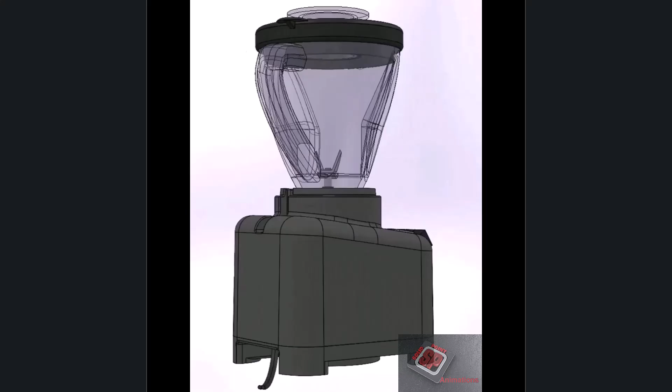This is a basic blender. You can find this machine in most kitchens across America and many throughout the world. Most people just use this product for its intended use, namely, to blend food together. They do this without giving much thought into how it works. In this video, we're going to change that.

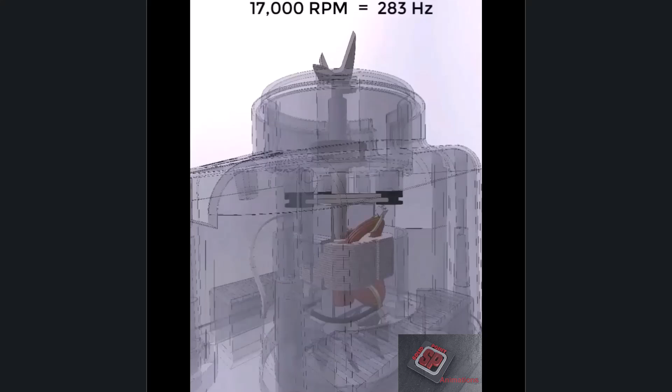We will go over how the blender is held together before we get into how electricity is turned on and moves through the device, how the electrical motor spins and expels its excess heat, and finally, how the blades of the blender actually break down and combine all the foods put into it. Wink wink, this probably does not happen how you think it does.

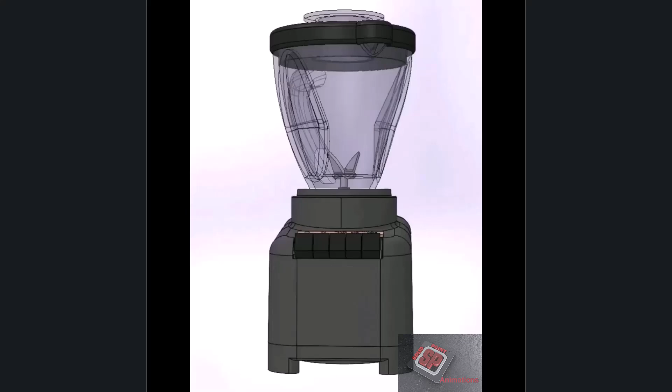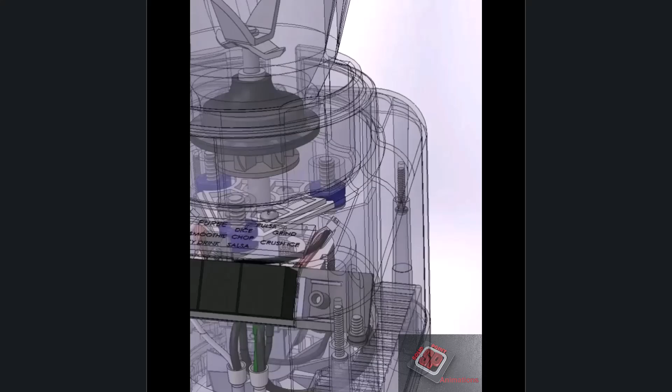This is the blender base. It holds everything together. It's split into the upper housing and the lower housing. The two housings are held together by these 4 screws, which can be accessed by a long neck screwdriver. The motor is screwed onto the upper housing via grommets using flange round head screws.

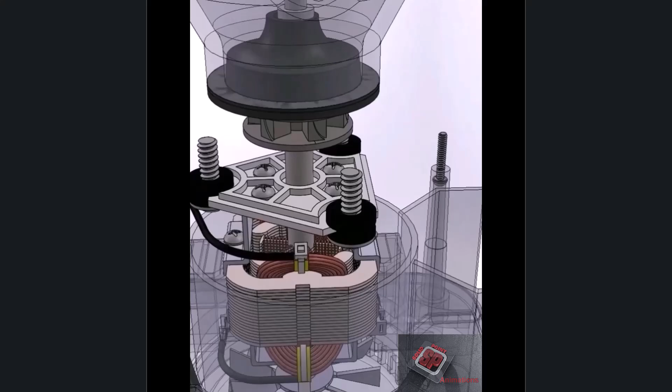These screws have a large load bearing capability because they are able to spread the preload of the screw over a larger area than a regular screw. This prevents the screw from pulling through the material under load, which is especially helpful when what you're screwing into is a rubber grommet. The grommets are then in turn attached to the motor mount, which has these 4 screws affixing it to the stationary part of the motor called the stator.

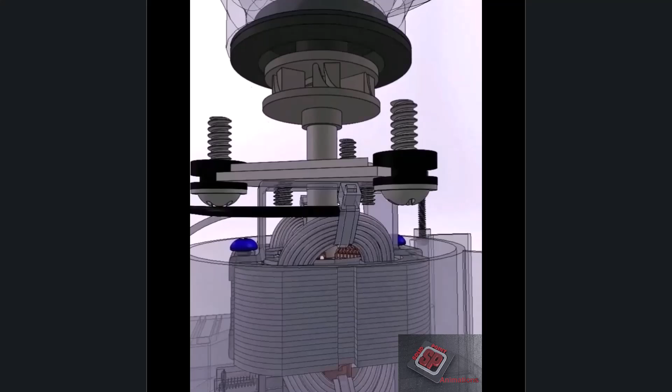The stator is made up of lots of different parts that we will not get into in this video. I do want to point out though, that these 2 long screws hold all the various parts of the stator together. The whole motor hangs down into the hollow cylinder of the lower housing.

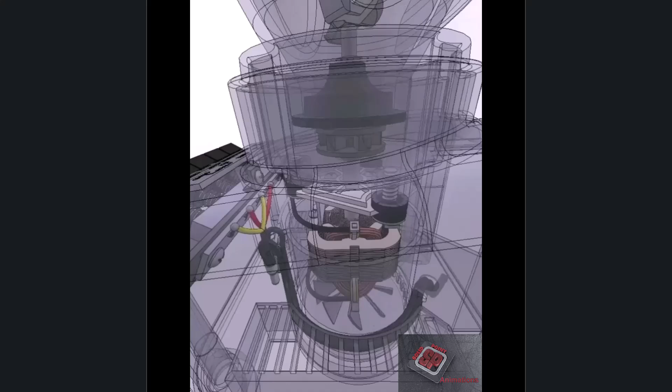The motor is held up by the motor mount and 3 grommets because the harmonic vibrations of a hanging motor spinning at 17,000 to 30,000 revolutions per minute can be quite intense, especially one that is even slightly unbalanced, as this harmonic simulation shows. Let's say the motor is spinning at 17,000 revolutions per minute. That translates to 283 Hertz.

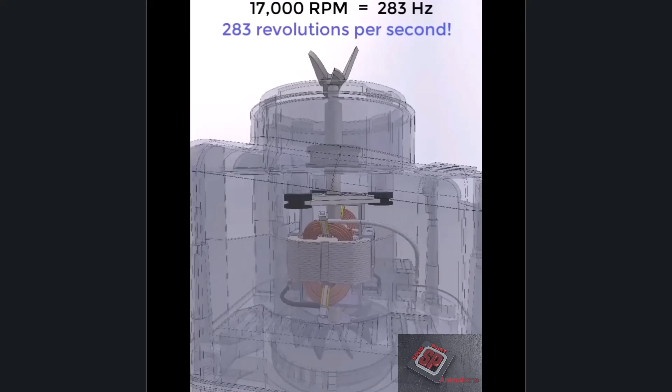The definition of Hertz is cycles per second, so this motor at this speed is spinning at 283 revolutions per second. At that speed, the simulation shows that the motor is vibrating back and forth about 6 thousandths of an inch. Its vibration is primarily damped by the 3 grommets it's hanging from, thus protecting the blender from its motor.

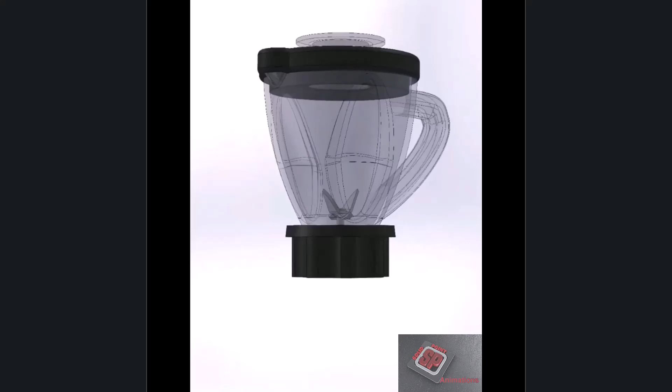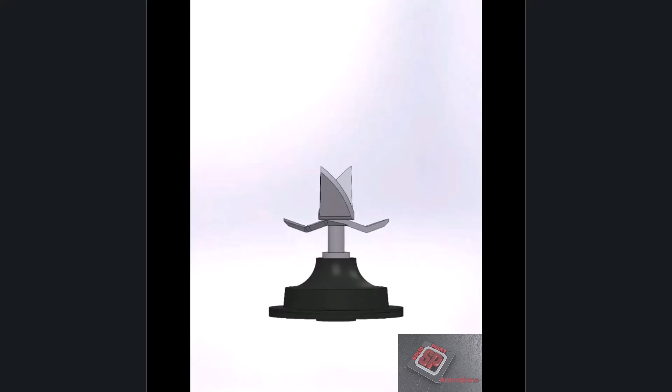Moving up from the engine, the container kit, which is made up of everything now shown, is needed to hold and blend food together. The container is not held onto the base by anything but gravity. The blender's user simply grabs onto the handle and lifts it off the base when ready to pour. This whole section of the container kit is called the cutter assembly.

This is the collar. Its job is to interact with the base and align itself with these grooves so that the user of the blender does not need to think about the position of the container when put on the blender. It can be just put down and the necessary alignment happens practically automatically.

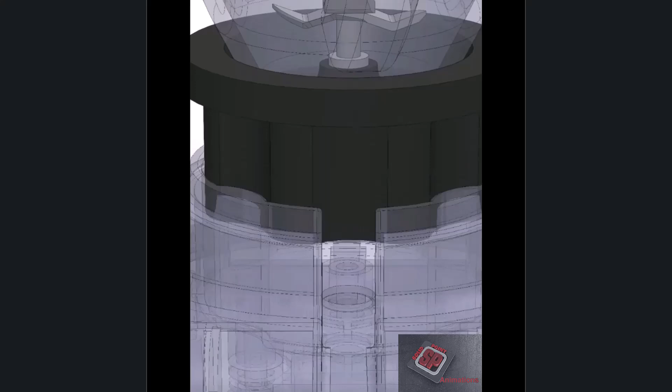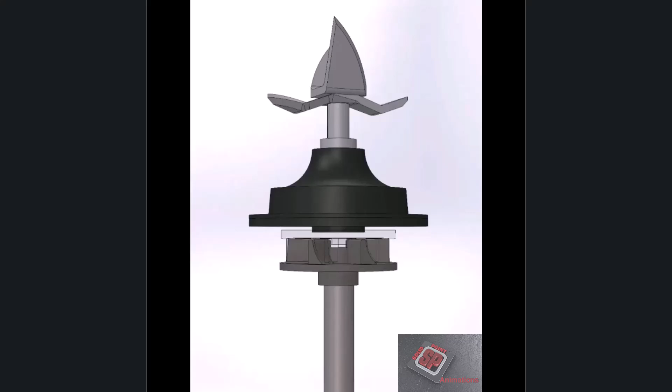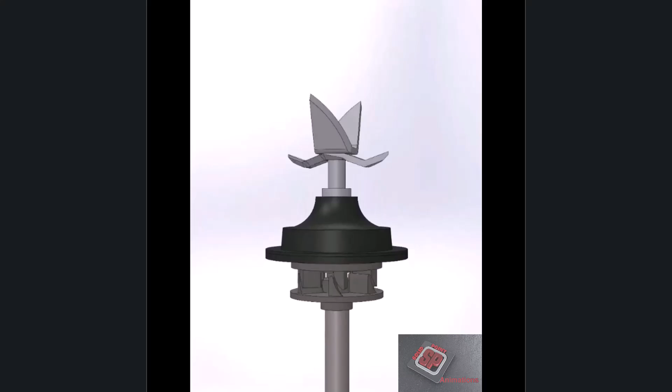There are 2 clutches. The bottom is connected to the motor and is called the motor clutch. The top is connected to the blades and is called the blades clutch. These 2 clutches are used in conjunction to transfer power from the motor to the blades. When the container is lifted off the base, even if the motor is currently spinning, the 2 clutches will disengage and the blades will stop spinning.

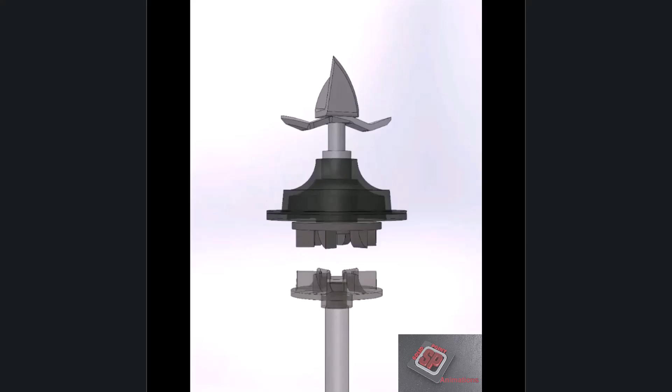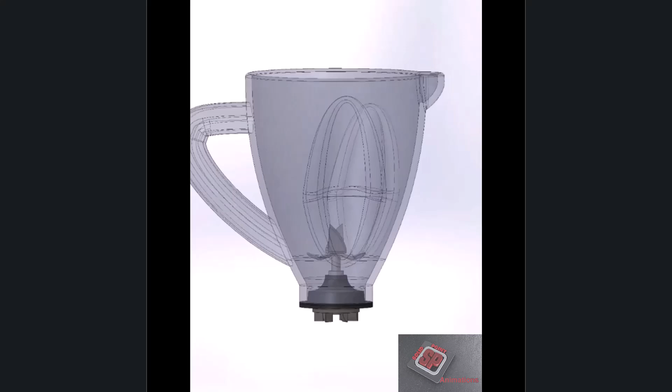These are the blades. They are connected to the blade clutch by this drive shaft. The blades stay centered because of the mounting plate, which, helped by very small gaskets not shown, also keeps liquid from falling into the base. Interacting with the outer diameter of the mounting plate is the jar. The jar is the food and liquid container.

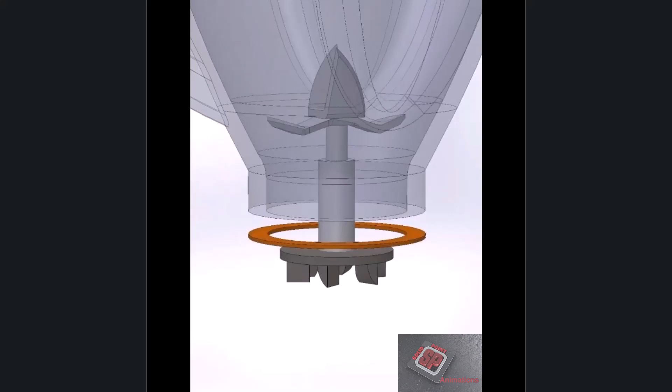It can be made of glass, plastic, or metal. Blender jars come in many different shapes and sizes just like blenders do. This is not a one-size-fits-all type of product. There is a rubber seal glued to the mounting plate which also prevents liquid from flowing out of the jar.

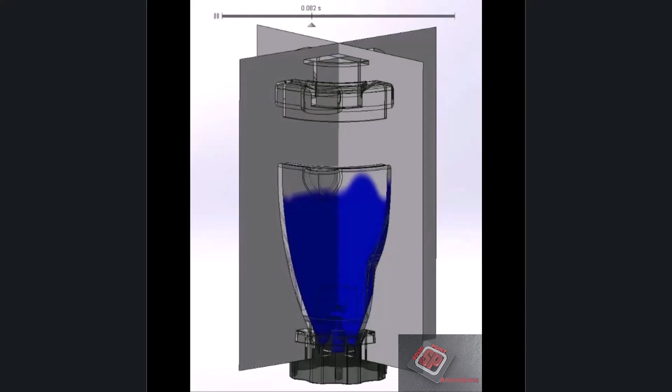This is the lid and filler cap. I am sure everyone listening to this video who has ever used a blender knows that if the lid and filler cap are not securely placed on the top of the jar when the blender is turned on, that there is a strong possibility that what is inside the jar will soon be everywhere else. This explosive mess shows the power of the spinning blades and the importance of the lid and filler cap.

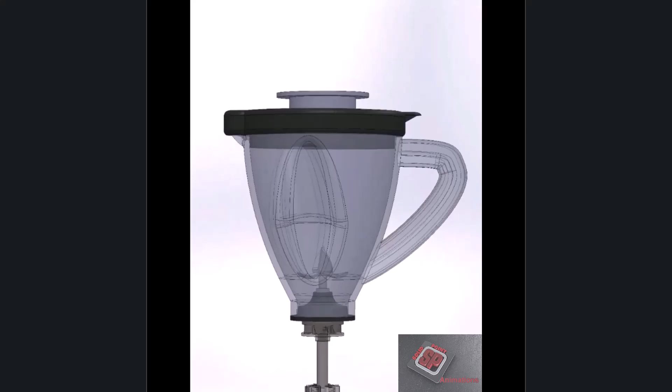Now that we know how the motor is mounted to the base and how it interacts with the blades causing them to spin, let's turn our attention to the control panel, which is how the blender is turned on. The control panel is held to this bracket by these two screws, which in turn is held to the upper housing by these three screws.

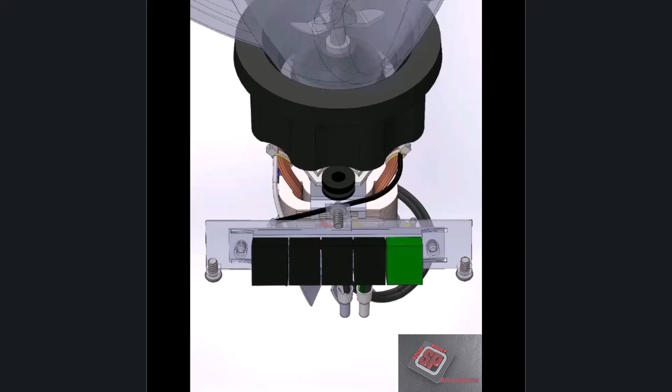If we come over to the 5 buttons of the control panel, this is where everything starts. This button turns the device off. When you push one of these 4 buttons, the blender will turn on and the blades will start to spin.

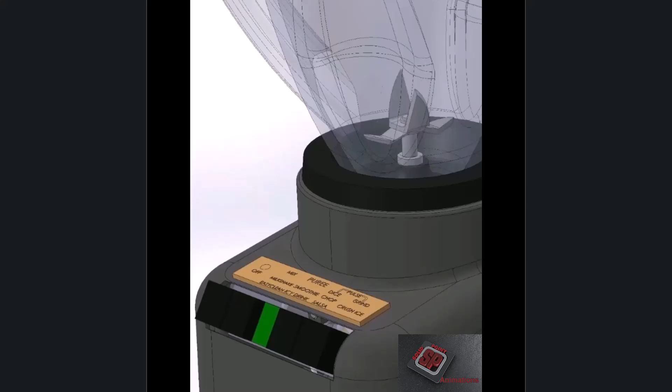These are the 2 pulse buttons. When one of these 2 buttons is pushed, the blender will only stay on as long as the button is being pushed down. When these 2 buttons are pushed, the button can be released and the blender will stay on. The off button or either of the pulse buttons will turn off the blender when one of the 2 permanently on buttons has been pressed.

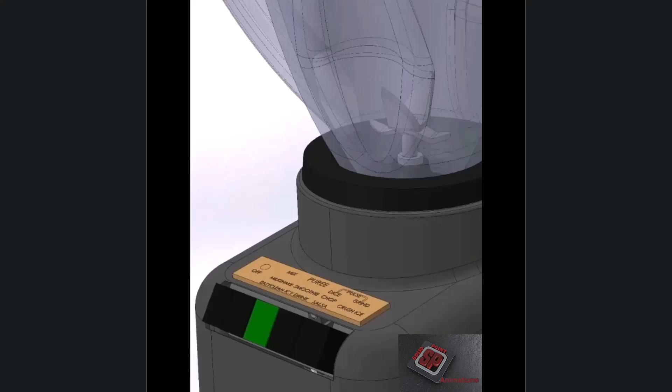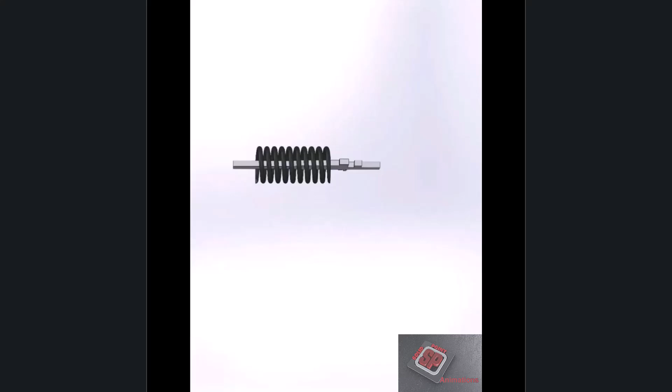So why do some buttons stay pressed down after being released and others do not? Let's see how the mechanism behind the buttons works. Each button has a spring that wants to push the button back up. Each button also has a small metal plate called a contact plate. This plate is precisely machined to keep the button in place and helps turn the blender on when the button is pressed down.

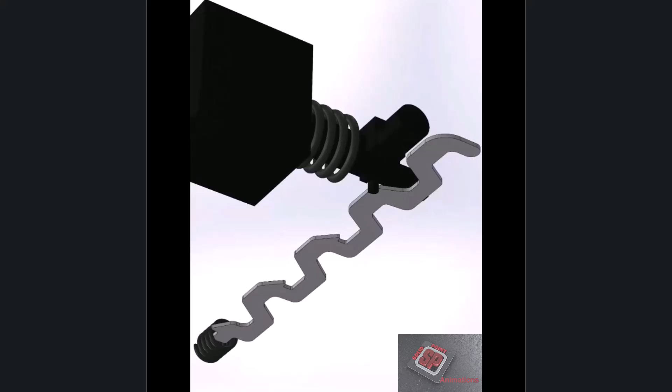Inside the control panel box, there is another longer metal plate, also precisely machined, called the slider plate. As the button is pressed, the slider plate is pushed to the left and compresses a small spring which pushes it back into its original position when the pressed button is released. At least, that is how 3 of the buttons work.

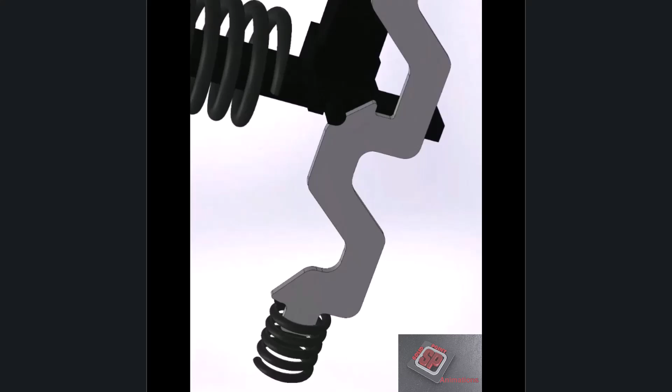The 2 permanently on buttons work a little differently. When one of these 2 buttons is pushed, the slider plate moves to the left in the exact same way, but push the button down far enough and it clicks into place. The slider plate has these cutouts in strategic positions that keep the button from going back up.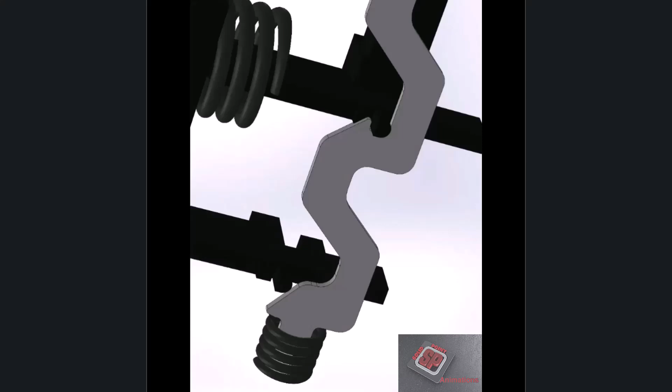The stiffness of the button spring pushing up and the slider plate pushing right keeps the slider plate and button stationary. The button and slider plate are essentially in a standoff which keeps the blender turned on. The only way to turn the blender off at this point is to push one of the buttons without a notch on the slider plate, like the off button. The compressed button is now free to move back up into its off position, turning the blender off as well.

Now let's see what pressing a button does. Here we're going to show a SOLIDWORKS Nonlinear Simulation of the button being pressed, and how it interacts with the rest of the mechanism. As you can see, pressing a control button moves this plastic push bar known as the plunger down, because it is connected to the button's contact plate.

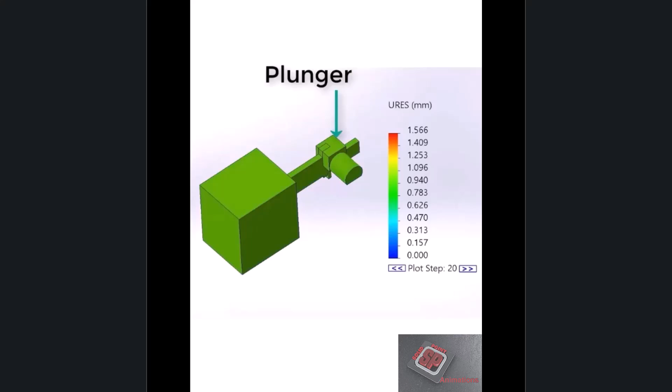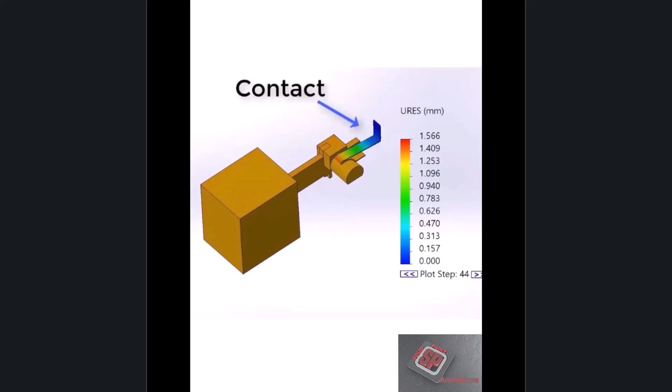Moving the plunger down makes it come in contact with this small, thin copper connecting strip called a contact, pushing it backwards. If the contact is pushed back far enough, it will touch another much longer copper strip spanning the length of the control panel, called the bus bar. Each of the 4 buttons that turns the blender on has one of these contact strips, and they each can come in contact with the bus bar.

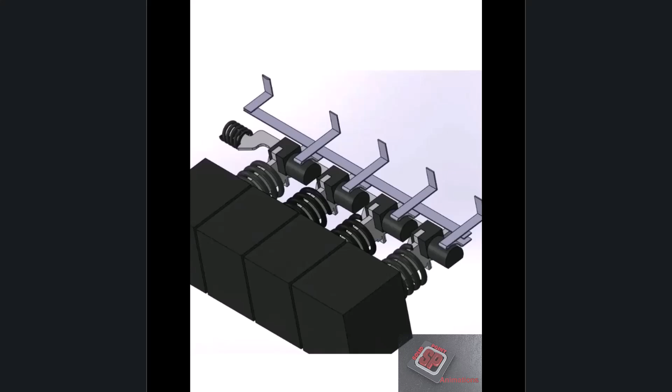When one of the contacts touches the bus bar, the motor will turn on because the electrical circuit of the blender has been closed. When the button is released, the contact springs back to its original position and the motor will turn off because the electrical circuit is now open.

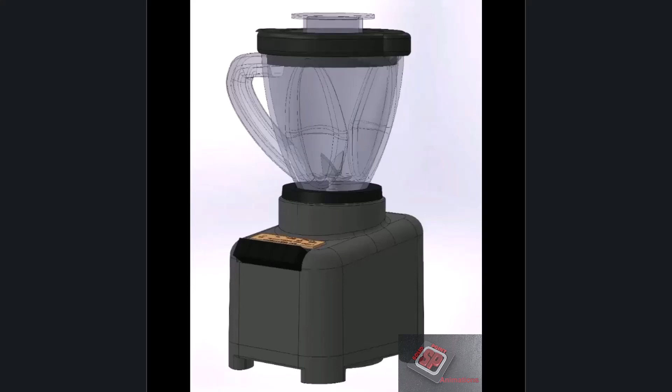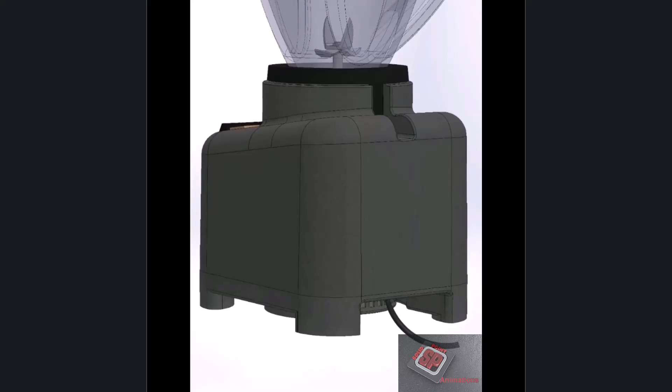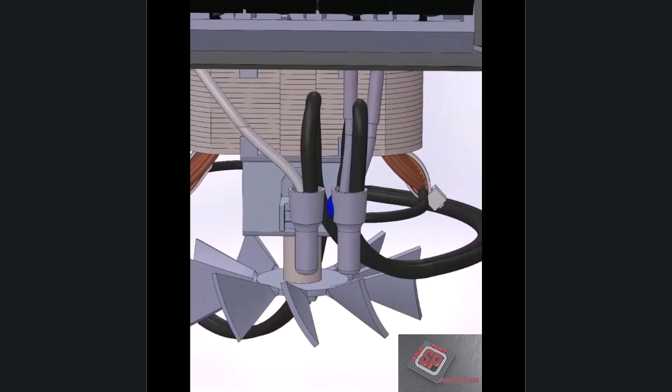After a button has been pressed and the electrical circuit is closed, let's investigate the pathway that electricity takes through the device. It starts at the plug, which has 2 copper wires. Electricity will start moving in one direction along one of these wires and the opposite direction in the other. When the electricity reaches the end of the plug, it is transferred to a different wire in this connector housing that holds several wires all intertwined and clamped down inside of it.

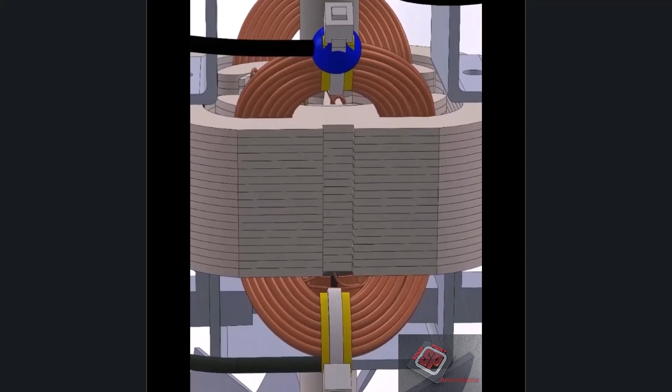The electricity goes up the new wire until it travels through a contact and then through the bus bar. It then travels along this black wire, which is connected by a simple zip tie to one of two stationary copper coils called a field coil. The electricity will travel through the field coil into another small wire and eventually reach the brush motor kit.

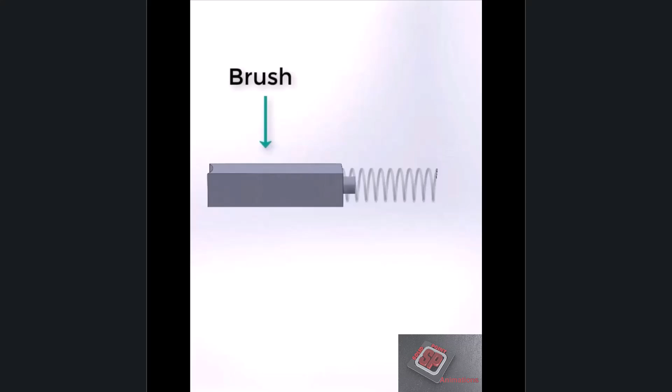The electrical motor used in this blender is called a brush motor because it uses a graphite brush to conduct electricity into the blender's motor. This brush is held in place by the brush housing and this spring behind the brush. The brush can be pushed back, but when released, it will be pushed forward quickly by the spring. This spring keeps the brush constantly up against the spinning portion of the electric motor called the rotor.

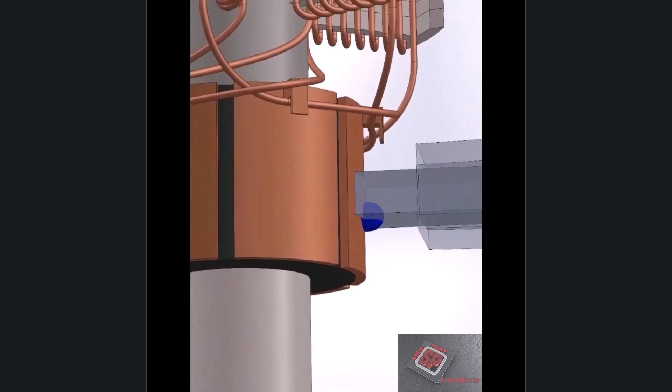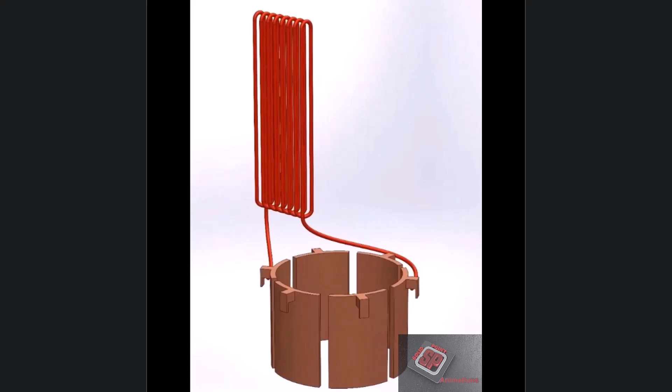The part of the rotor that the brush touches is called the commutator, which is made up of multiple copper segments that are separated and insulated from each other. Tied to each copper segment are copper windings known as the motor's armature windings. These windings connect one copper segment on one side of the commutator to the copper segment on the other side.

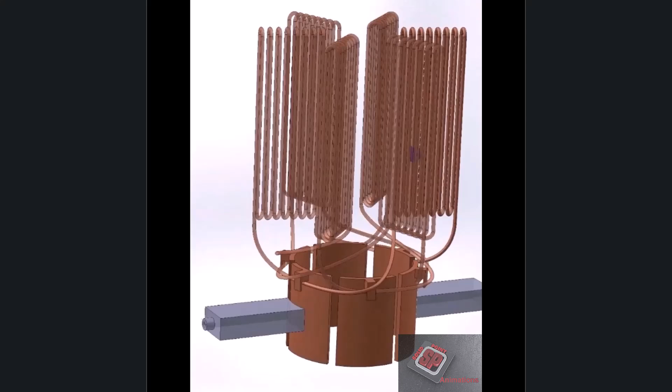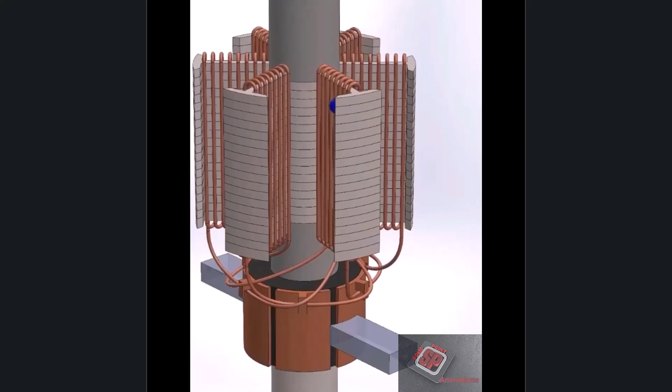There are two brushes, both touching their respective sections of the commutator 180 degrees from each other, and both part of the electrical circuit. With electricity flowing through the armature windings, an electromagnet is formed. We are not going to get into how the electromagnet is formed in this video, but suffice it to say, when the magnet first takes shape in this first set of armature windings, it spins the motor, which spinning motion causes the brushes to come in contact with the next set of copper segments, pushing the rotor a little farther, spinning it a bit more, and on it goes.

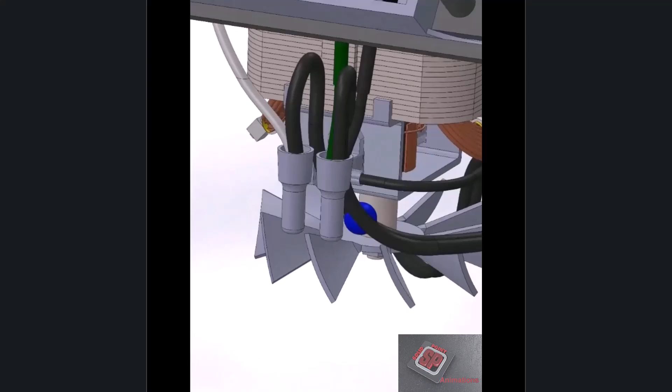As we continue on the electricity's path, it leaves the rotor along this short wire, through the second field coil on the opposite side, and then through this white wire, which is connected to the second copper wire of the plug in this second connector housing, allowing the electricity to move along the opposite side it entered, thus completing the circuit.

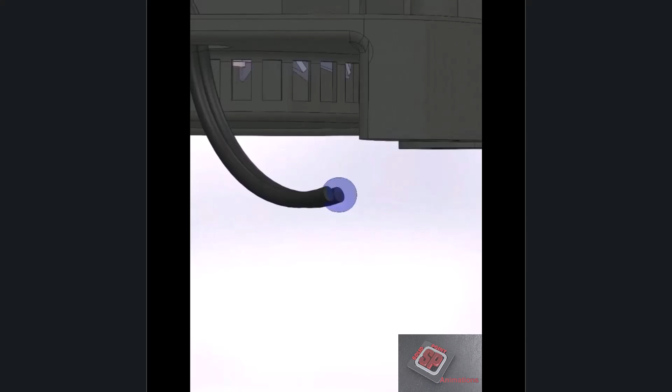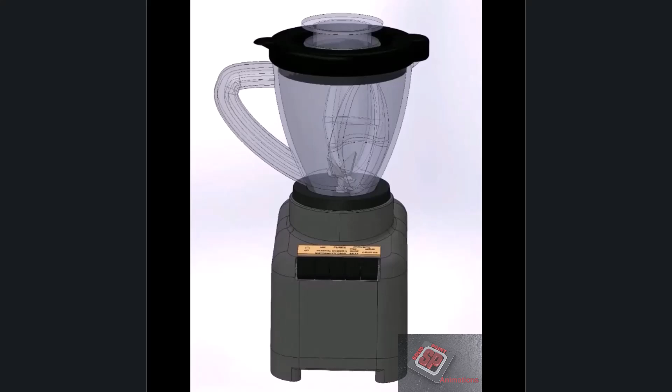Everything we've been over this far in this video, all of these complex mechanisms, have one purpose: to spin the blender blades, which spinning is obviously powered by the electrical motor, and the spinning creates a lot of heat. This heat is expelled by the engine itself because a fan is bolted directly onto the bottom of the rotor, so it spins at the same speed the engine spins.

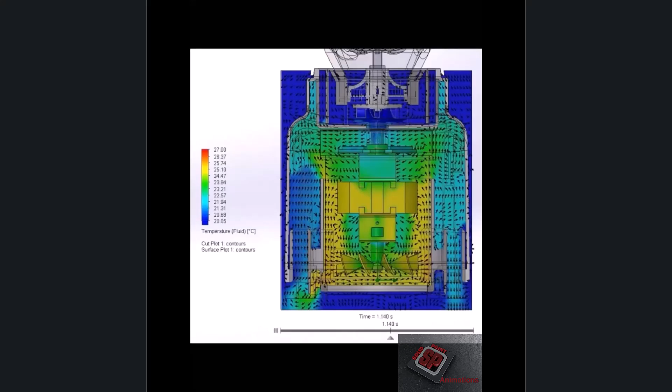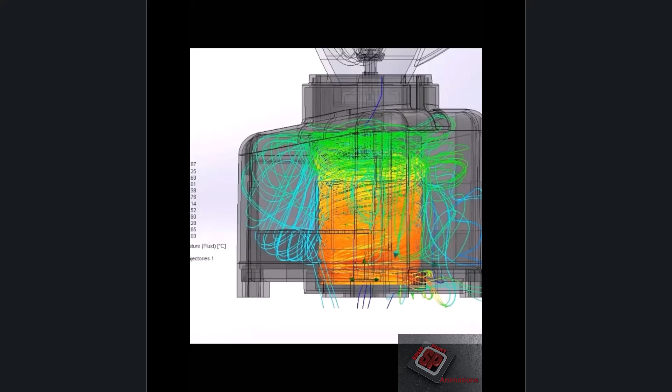As this fan spins, it creates a powerful vortex of air in the hollow cylinder that the engine hangs down in. As you can see, cold air is pulled into the base through these slots at the base of the cylinder and these slots at the side of the lower housing. This air is moved around in the base and especially vortexes around the engine, which is the main heat source in the blender. This vortex gives the air plenty of time to suck heat from the engine, then move out of the base through these slots, taking the heat with it, allowing more cold air to be sucked in.

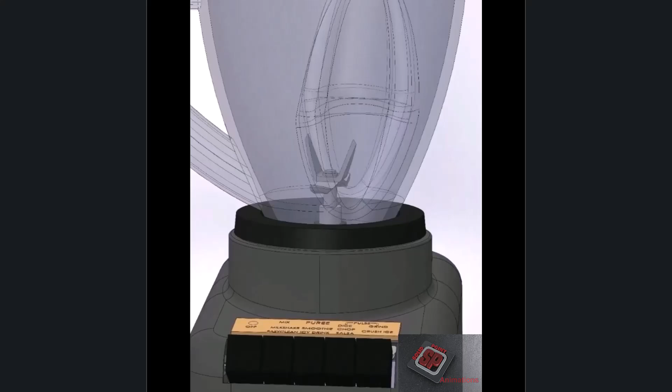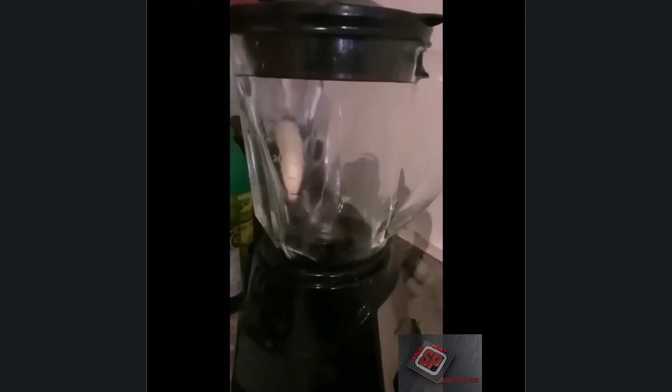Towards the beginning of this video, I told you the ability of the blender to pulverize solid food into a liquid slush possibly does not happen the way you might think. I know before I started researching blenders, I thought the blending process was due to the sharpness of the blades spinning so fast that they cut the food particles over and over again until they were so small they became a slushy. This cutting process is how the solid food is broken up into smaller chunks at first, but it is not the end of the story. Blenders have two other processes that break up the food into much smaller bits than the sharpness of the blades could ever account for.

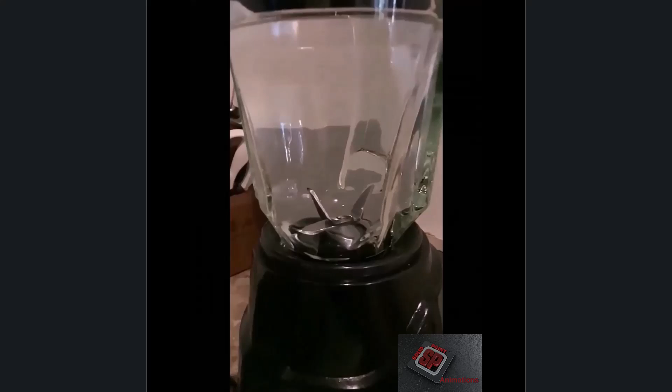The first of the two processes is that the blades of the blender spin so quickly that they form a vortex of spinning liquid that is sucked down the middle of the jar and flung out and up along the hard walls of the jar at such a velocity that it pulverizes the food. The second process is called cavitation. Cavitation happens when bubbles form in a liquid that is not at its normal boiling point. It is essentially boiling not because it is too hot, but because the pressure in the liquid is so low that it forms bubbles at low temperatures.

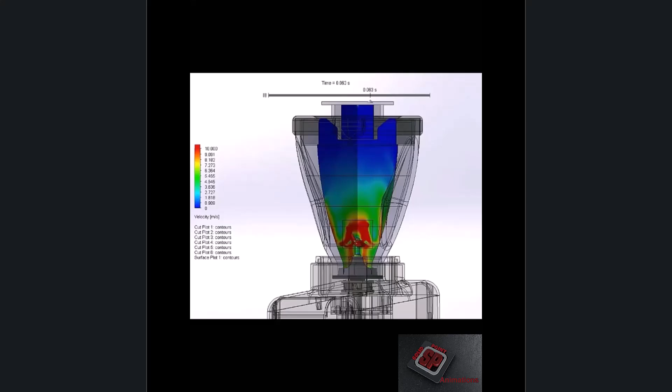This cavitation process happens in a blender because the blades of the blender spin so quickly that it increases the localized speed of the liquid in this area, making a low pressure zone. Here we see a plot of how fast the local liquid is moving around the blades. The liquid boils at ambient temperatures in this zone, creating small steam bubbles. These bubbles cannot be shown in flow simulation, but we can see where the low pressure zone forms on and around the blades, as well as see plots of density and volume fraction of vapor.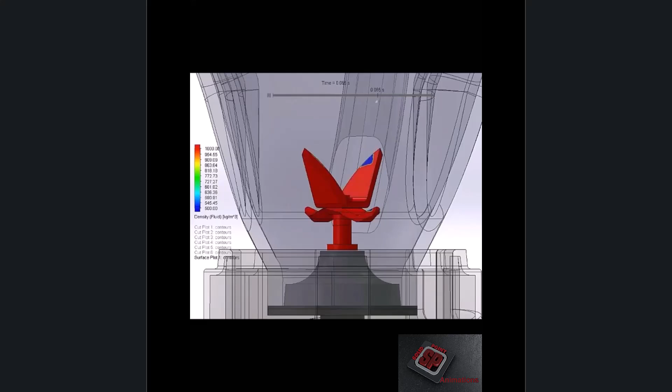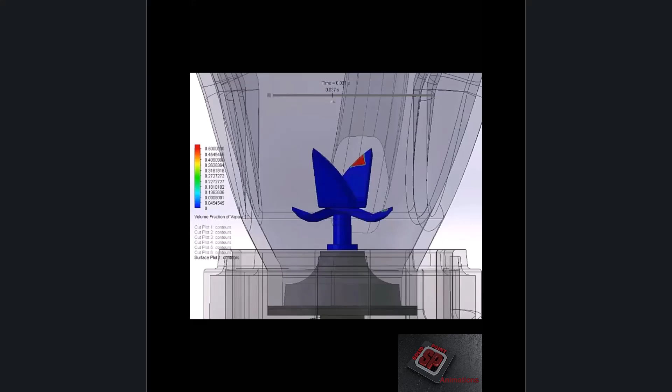The density plot shows the area where bubbles form because steam bubbles have a much lower density than liquid water. And the volume fraction of vapor plot shows bubbles forming in the same areas because this plot shows a percentage of how much of the liquid is taken up by vapor versus fluid, 0 being pure liquid and 1 being only vapor. You can see the red areas of the blades show a 50-50 split between bubbles and liquid in this area. These bubbles move around in the liquid like everything else in the blender jar.

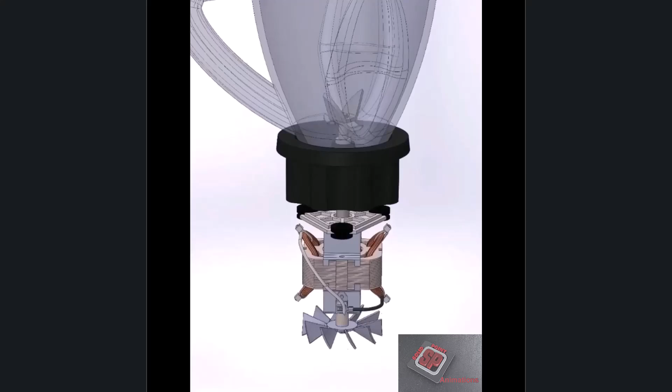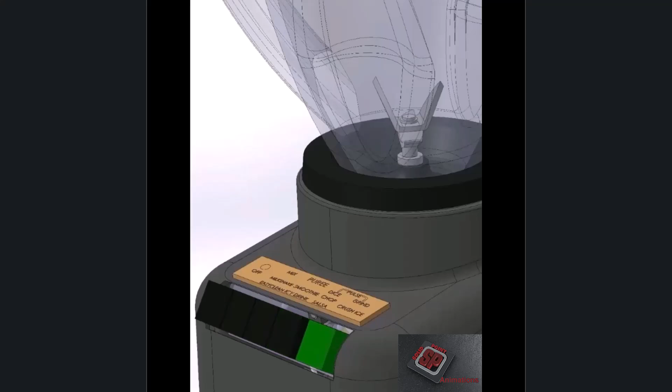As a bubble moves from a low pressure zone to a high pressure zone, the low pressure bubble implodes. Each of these implosions create powerful local shock waves that further break down the food particles in the surrounding liquid. Now you know the various parts of a basic blender and how they all fit and work together to get the blender's blades to spin so fast that they can break solid food into smoothie. So the next time you press one of your blender's buttons, you might stop and ponder on all these complex mechanisms and think, maybe this blender is not so basic after all.